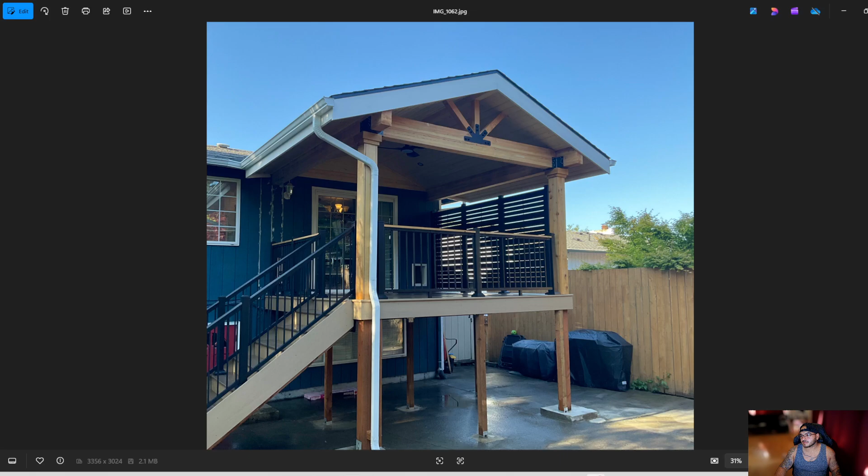This is a project I recently completed about 3 months ago. I inherited this project from another contractor who didn't pull any permits and didn't know what they were doing with the roof either. So I had to come in, get a permit from the city, do the drawings, get my engineer to stamp the drawings, and build the cover. The deck was mainly built, but we needed to add supports, brackets, and many things that the previous contractor missed or didn't know how to do.

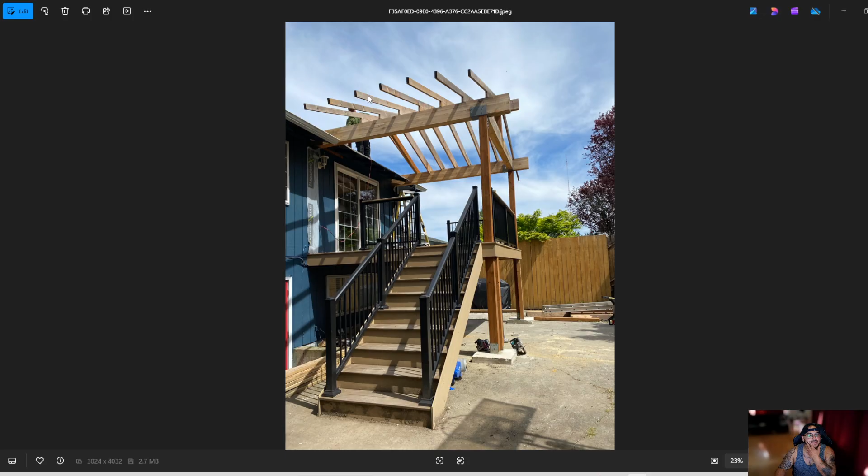So this is the project, and I'll show you how I inherited it. If you look up here, you see how these rafter tails are way above the roof, and the beam was above the roof line as well. These beams were sitting there for months already — where the brackets are, they were already really dark.

As you can see, I added that. I'll show you the plans right now, but I did so many things - I don't want to get into all of it, but this is how I inherited the project.

Me and the homeowner tried to match the paint but we couldn't. So the homeowner said she's probably going to wait a little bit because she's going to paint the house. So this caulking right here is just because we couldn't paint it at the moment — we didn't have paint that matched their siding. She said just to wait and leave it like that.

But yeah, we got cedar wraps, privacy screens, fan, all kinds of stuff — just a nice covered deck.

We got low voltage fan and lights that they control by an app, and all kinds of nice stuff. Hideaway privacy screens, TimberTech Impression rails with a drink rail, cedar drink rail on top. That's the main thing.

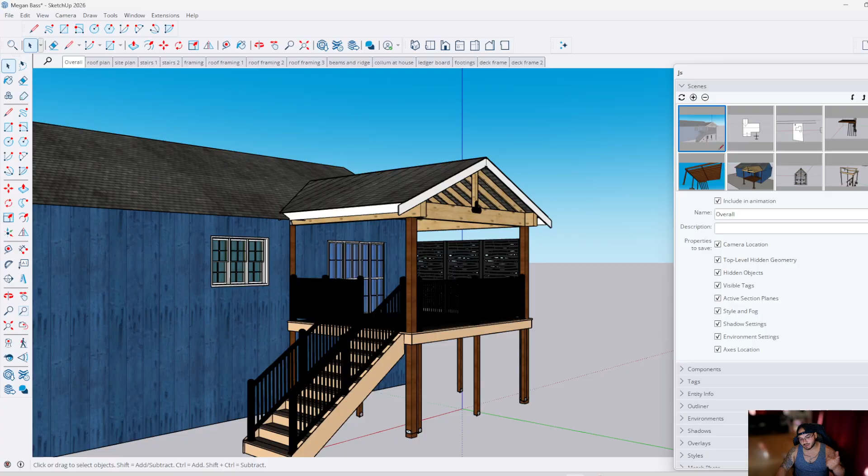Now let's jump onto the SketchUp. Here's my SketchUp — this was a while ago. So here's what I came up with. I didn't put the TNG on this specific drawing, but you can see most of the details here.

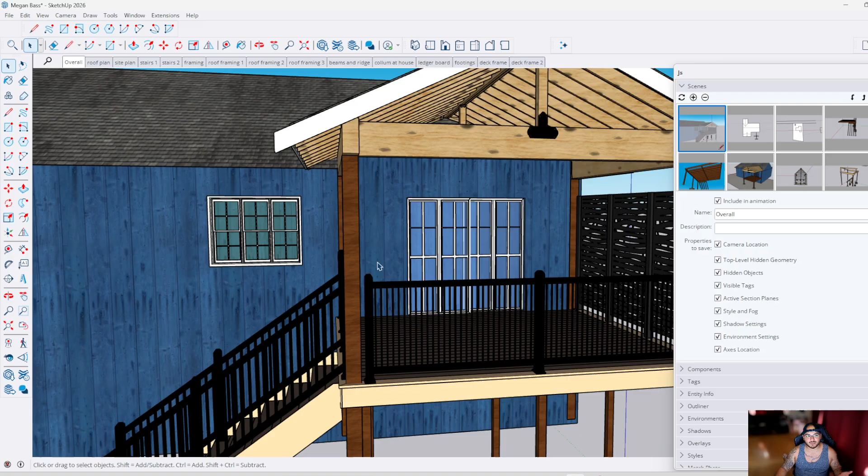What is this? It's a little line — let's get rid of it. Oh no, that's the roof line. Yeah, I think I was trying to mess with it to make it look like the picture. The post wraps weren't in the picture at that time, so this is what it looks like — pressure treated post. But yeah, this is my SketchUp file of the project.

These footings were not there, this post was not there, these were not here. The deck was bouncy, so I suggested adding three new footings.

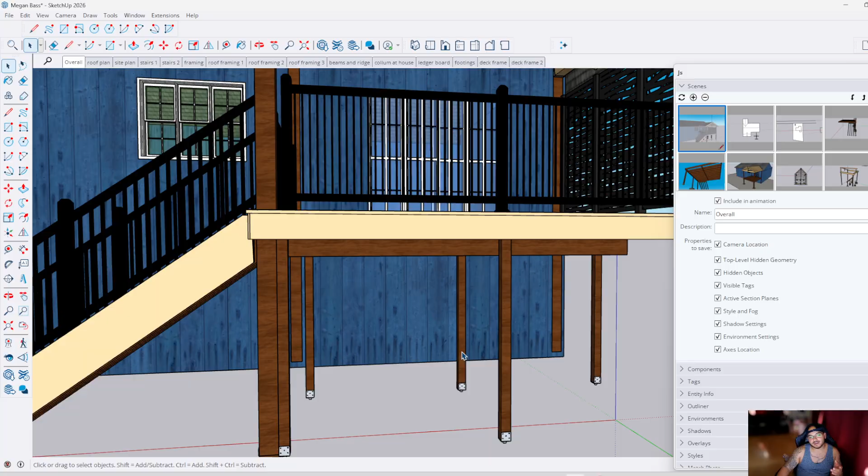And what's supporting the beams at the back of the house was just a bunch of 2x4s put together, coming down to the foundation. It's really important when you build this type of structure that you either have a post or some type of support that brings the load all the way down. I don't like having a post in the back of the house unless the homeowner really wants it. 100% of the time I'm suggesting them not to have posts in the back — it just looks odd, ugly, like it's not integrated into the house.

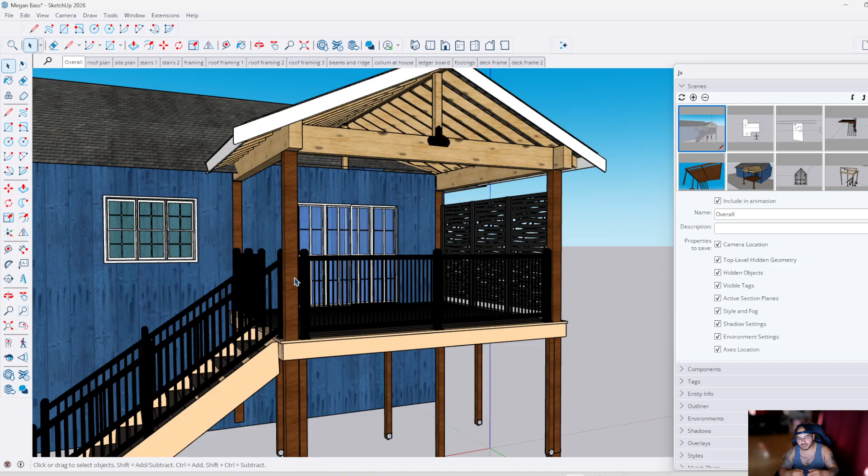So I always talk them out of it and tell them, hey, it's going to cost a little more because we have to open up the siding, open up the cavity, and bring that load all the way down to the concrete. So that's what we did here — that's why we had the caulking on the siding. Everything comes down to the foundation, which is really important, and that's here on the back.

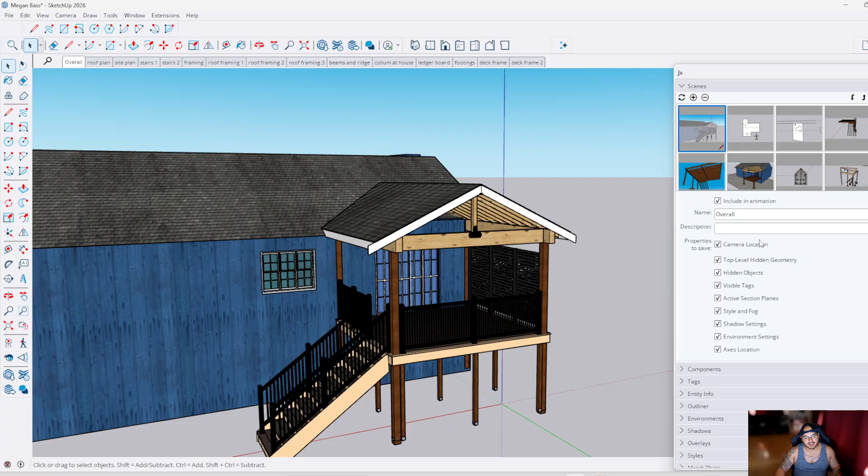Let's take a look at some of the scenes I have here. Give me a second — let's see this photo view, I believe. Where is that at, maybe window, that way it doesn't take so long to change from this camera to this view.

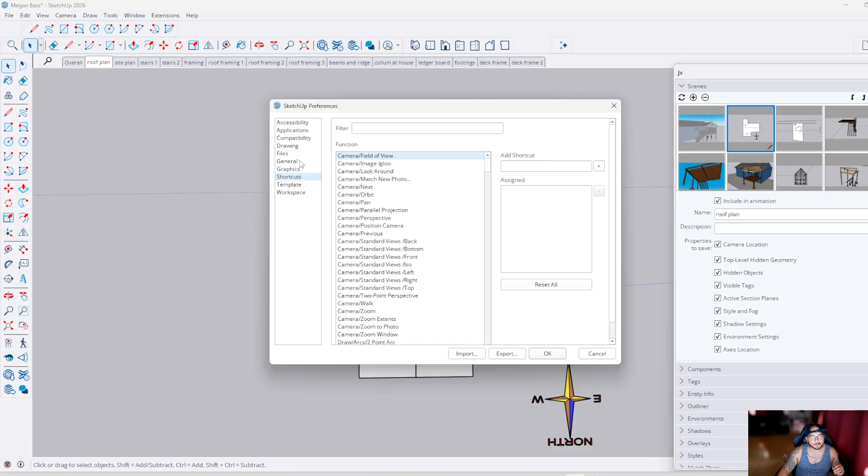Columns, maybe window preferences, graphics. No, what was that, applications? Sorry about that. There's a way to make it so that the next scene doesn't take so long to load. Animation settings. Here, there you go. So scene delay enabled, no. So disable that, and I think I should be good. Let's see. Yeah, okay. So see, I just switched.

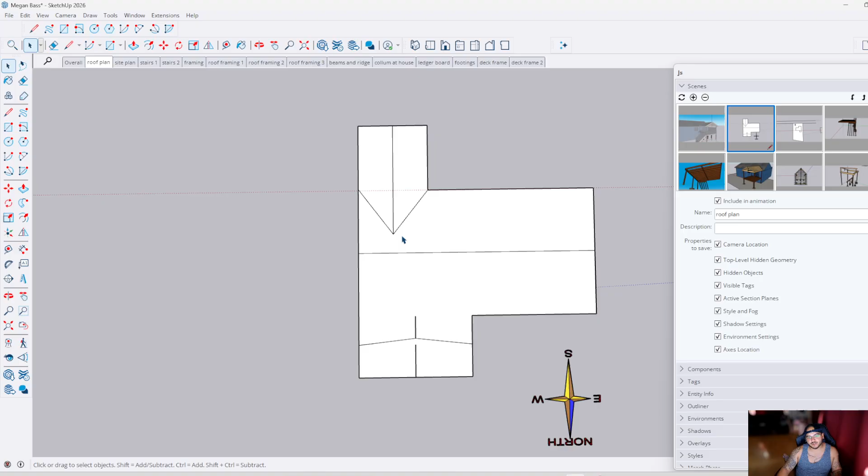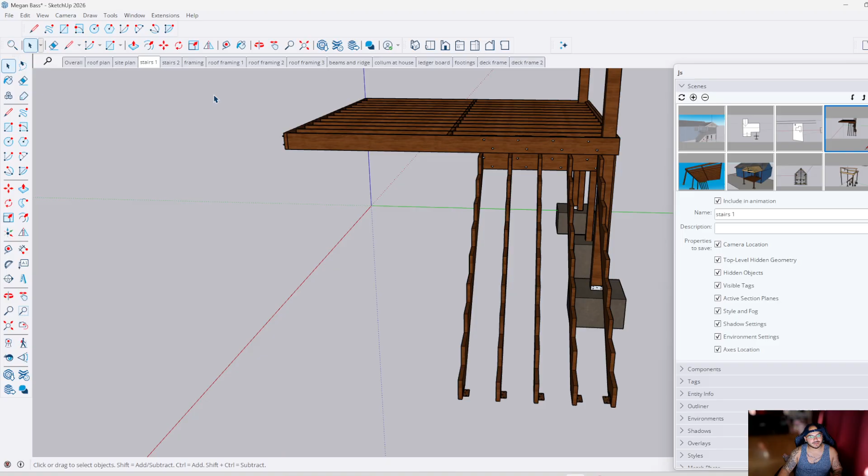So this is the roof plan. You have to show the current layout of the house. So a line going across means there's a gable, and these lines in between mean a valley. There's a small little gable at the front, and this is the house basically, and this is the new roof that we added here, and then the site plan of the house, and then my stairs, the details I had on my stairs, the little bracket here, and then this is how I attach my stairs.

Everything's called out on layout. I'll show you right now. And then the stairs too. So I just have another scene to be able to zoom in through the back. My framing, this is where I call out my rafters. I think we use 2x8 rafters, 6x12 beams, 6x6 posts, and all kinds of stuff.

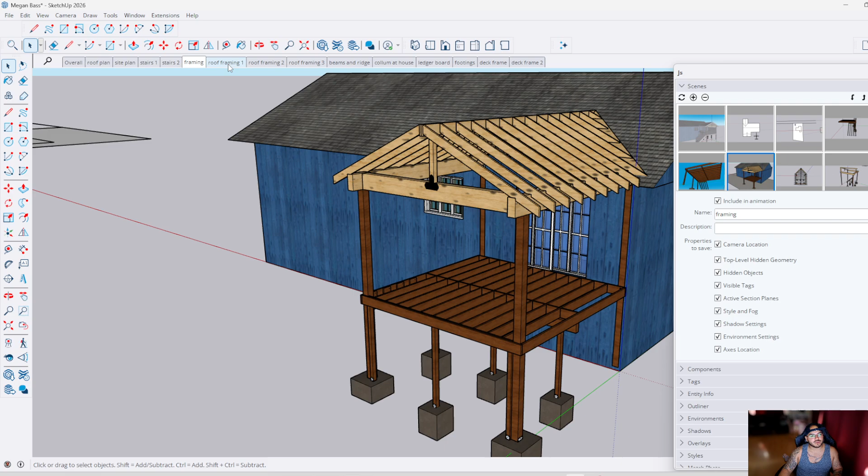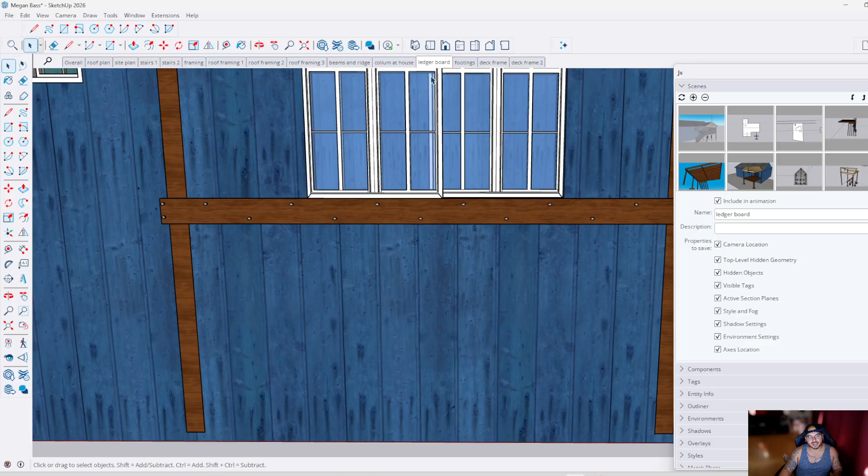So this is from the top, the valley, the roof framing by itself, just the roof beams, ridge, column, ledger. So I think on this scene I didn't have the house. So this is the ledger for the deck, the footings. I think I just pressed hide on the other ones for now. It's just because I went back and I fixed some stuff, and everything got moved all over the place. It's not really ordered how it first was.

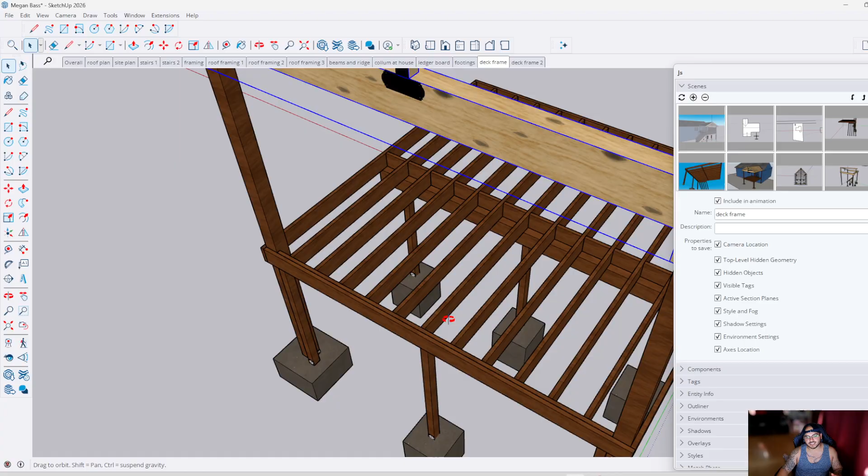Deck frame, you see, before, you didn't see this on a deck frame, but you just see the top view of the frame, deck frame 2. And now let's jump onto the layout for this. So this is how I present my drawings to the city, and this is how I submit them basically.

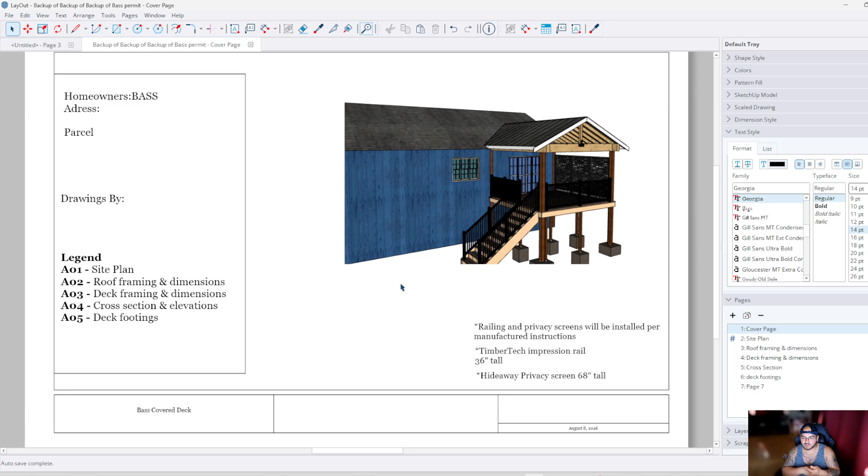So I have a cover page with the legend, drawings, who does the drawings, just me, the homeowner's name, address, the parcel number of the property, basically the number assigned to the lot, the site plan. That's pretty typical. And then this is where I get into all the details. I like to be really, really descriptive of my details and what I'm gonna do. So yeah, this is kind of how they look.

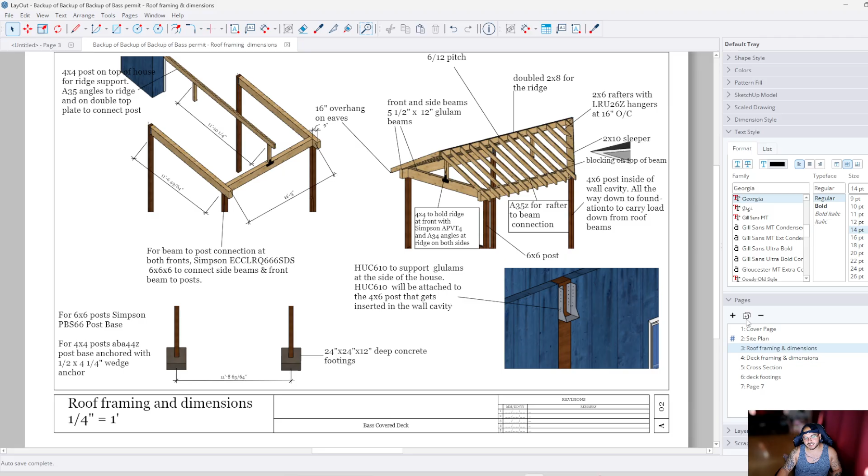Keep in mind, you see this right here, that's something that I added later on. So of course this will be out of the plans basically. That just got in there because I wanted to edit some extra stuff, but yeah, these are my details, got some dimensions, 16, the overhang, the beams I'm using, the hangers I'm using, the footings. So that's the deck, the roof framing and dimensions.

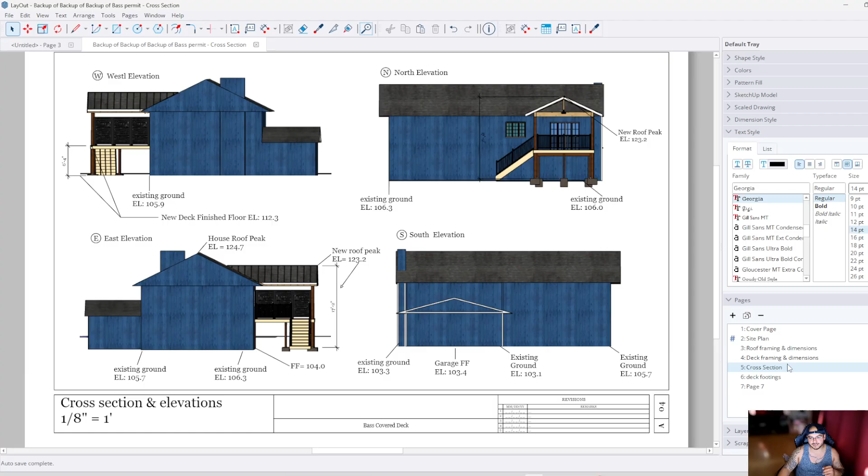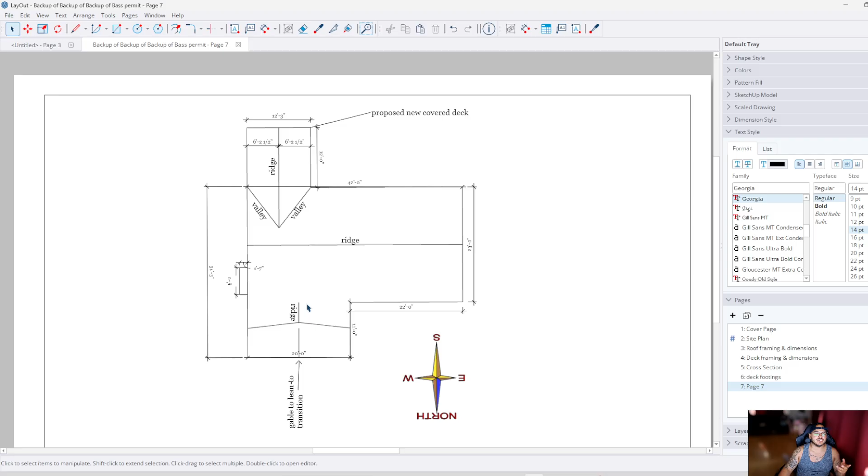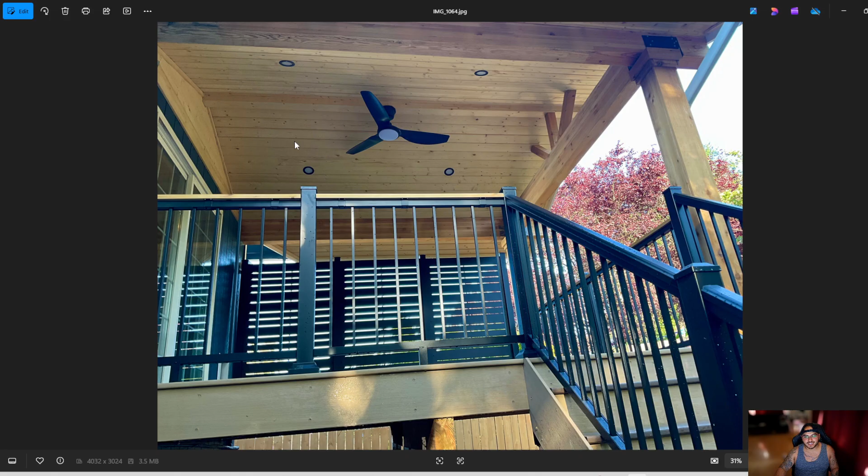So yeah, that was this project, and I'm really proud of how this project came out. I'm glad I was able to come in and do my thing, and build something for the homeowners that they can enjoy, and it's built right for years to come. So yeah, that's this project. Just wanted to share and show you guys.